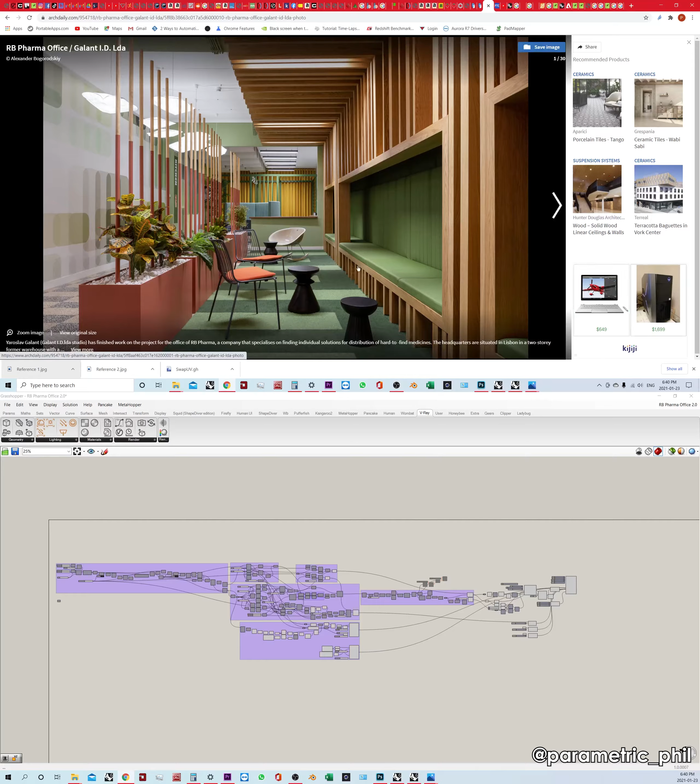There's a lot of aspects of this design that I think are brilliant. There's also a lot going on, which is difficult to manage in a project like this when there's so many different design motifs going on. But I think they pulled it off pretty well. The color palette is beautiful, they really did a good job on that. And there's a lot of interesting features in this design.

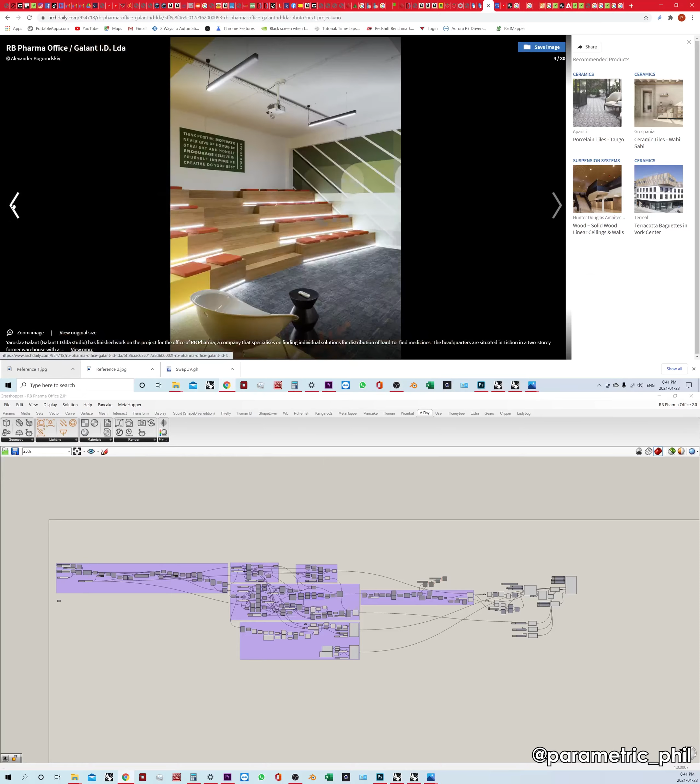But if you look, a few of the things that are really interesting for us when we're looking at parametric design is this kind of wood installation on this feature wall. That's a really interesting design with the integrated bench.

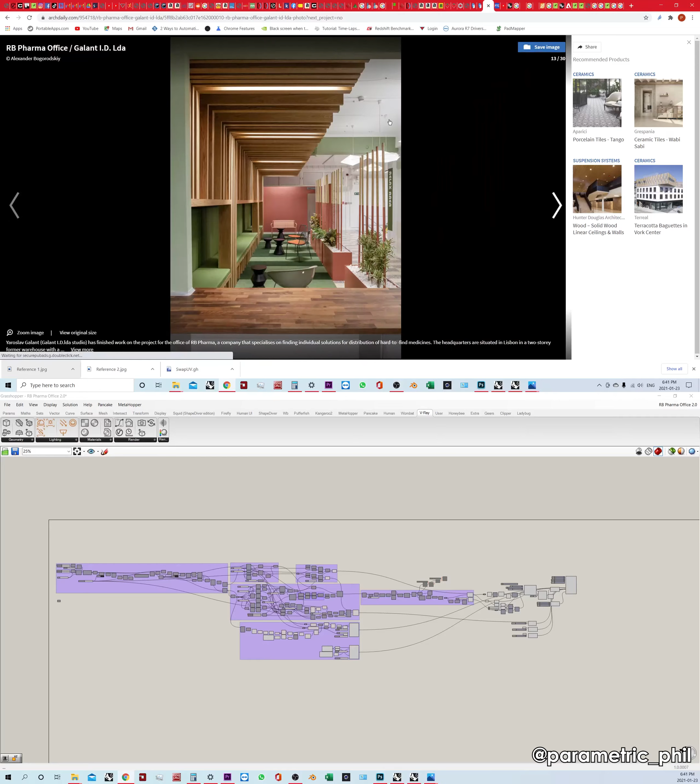It's interesting because it sort of gives this organic feeling, because you can see the randomness. You can see that there's no consistency in the spacing and also the lighting. It really gives that kind of organic feel, and it just goes to show that organic design doesn't always have to be some crazy flowy design. It can be something more rigid, but as long as you incorporate some amount of randomness into the design, it feels a little bit more comfortable, I think.

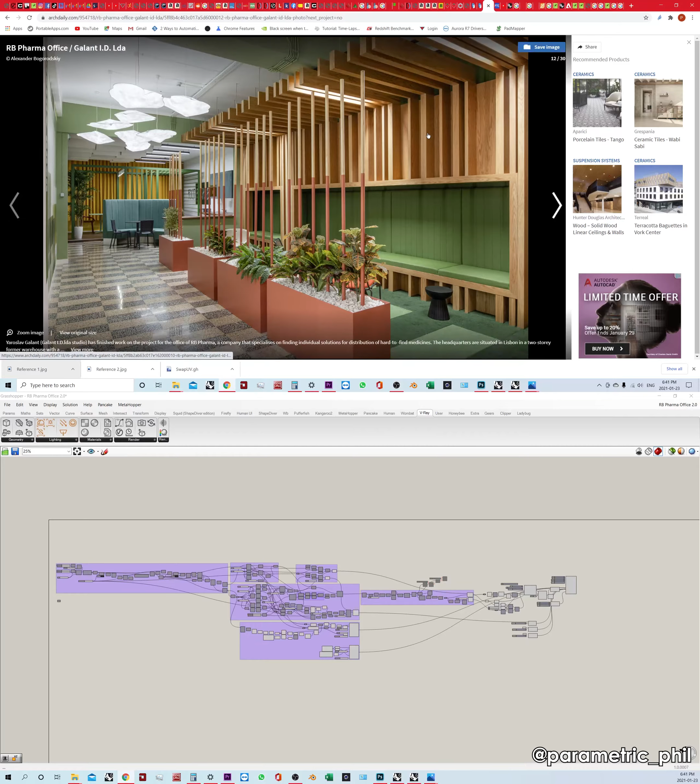So that's the project that we're going to be focused on today. But let's look at a few of the other designs that are going on here.

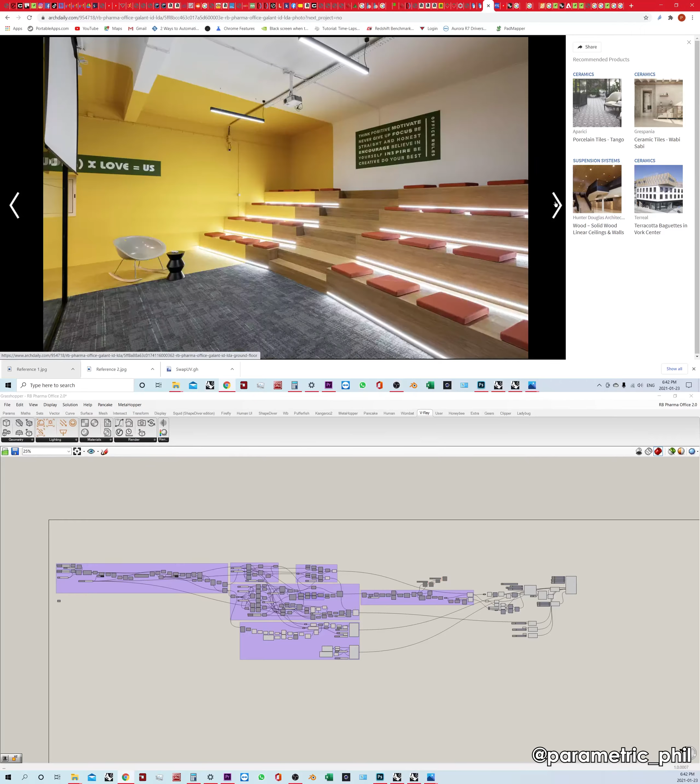But we can also see this organic motif in this wall here. They have the strip lighting, but you can see they've integrated that kind of randomness in here, which I think is doing the same effect.

When you integrate some amount of randomness into the design, it kind of loosens it up and makes it feel more natural. But it's sort of like a modern interpretation of a natural environment, because obviously everything is 90-degree angles, straight edges. So it's always kind of interesting, oh, here's another picture of it.

Really interesting design that they're working with here. But obviously a lot of different things going on here. I don't know if it's too much, but it seems to work pretty well. So it would be fun to check this place out in person.

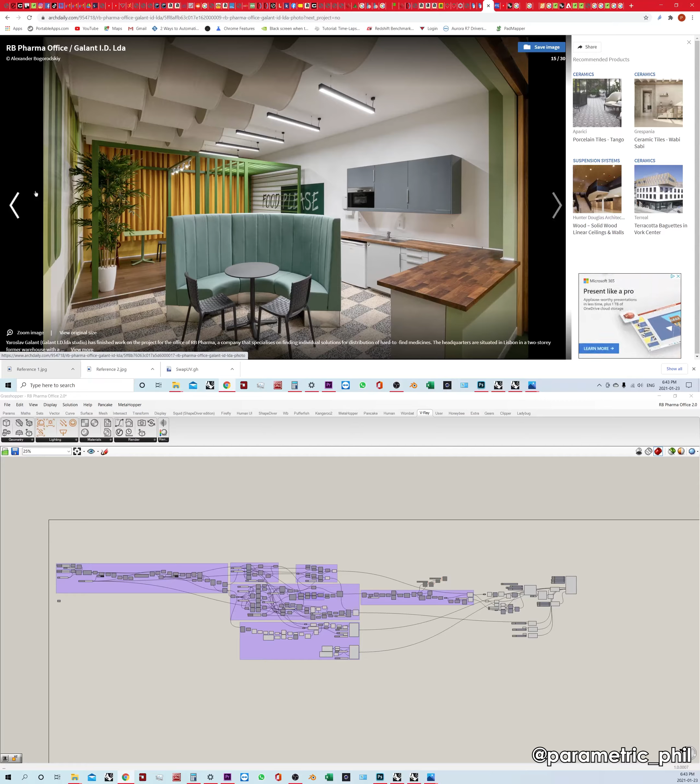So anyways, let's take a look at this feature wall. Well, I don't know if it's a feature wall, there's a lot of features going on here, but this wall in particular...

This is a project that could benefit from a parametric tool like Grasshopper. As you can see, it's like an array, because every single piece is the same, and we're kind of arraying it, except the spacing is not consistent. The spacing is random, and then we're going to punch some holes into the design to create our benches. So that's the fundamentals of how this is working.

Now, a few of the things that we want to be thinking about is, how do we create spacing that's not too large, not too small, but mostly how do we create this array so that the objects don't overlap? Because we have spacing here that goes down to like 10 millimeters, it looks like, and some spacing that goes up to like 400 millimeters. How do we create something like that so these objects don't overlap?

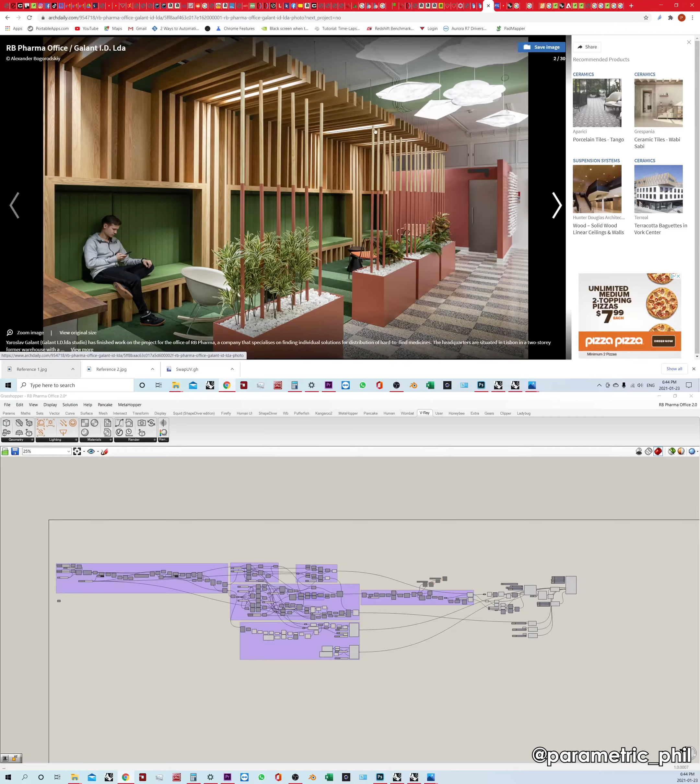Well, let's take a look at the Grasshopper script. So let's head in here. This is one of the renderings that we ended up with, and this is what the model looks like.

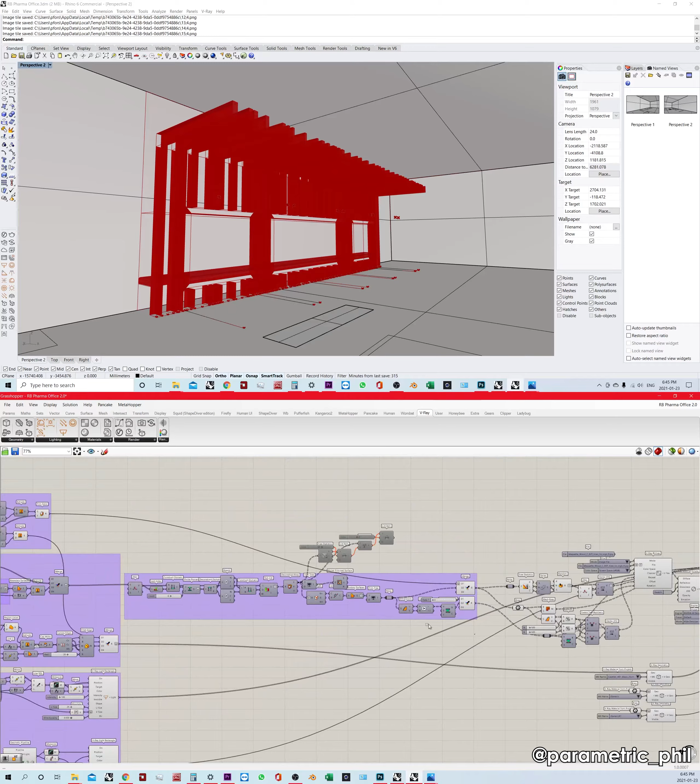The script is bigger than I thought it was going to be. It got a little bit out of hand when I got really into the parameters, and I wanted to be really strict about the final parameters of this design.

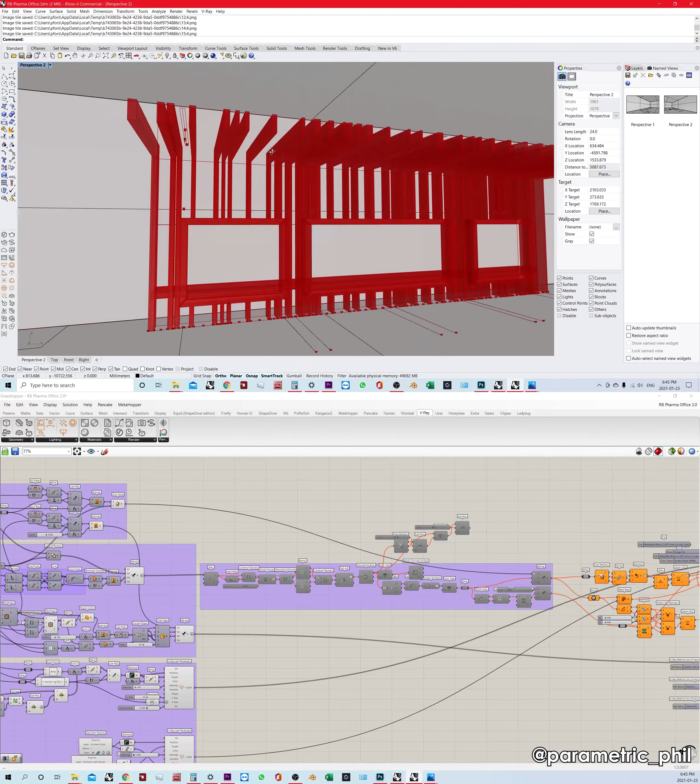The reason for that is, like I said, I wanted to create this inconsistent spacing, but I wanted to make sure none of them were overlapping. This was just sort of a brain exercise. It's more complicated than it needs to be, but I wanted to go through the exercise of doing it right and practicing precision in this script.

So how does this work? Well, we could make a script that either does an array along a curve or a linear array, and then we could shuffle them around to change the location of them in the x-axis. But then you would probably have some of them overlapping.

We could also just set up an algorithm to basically create random values from this point to this point, and then it would lay them all out, a certain number of them, between those two points. But that would also most likely result in overlapping objects. So how do we avoid that?

Basically what we're doing here, in this section of the script, is... let's see, how does this work? By the time I get to the end of the script, I usually forget exactly how the start of the script works. Well, basically we're creating multiple objects first.

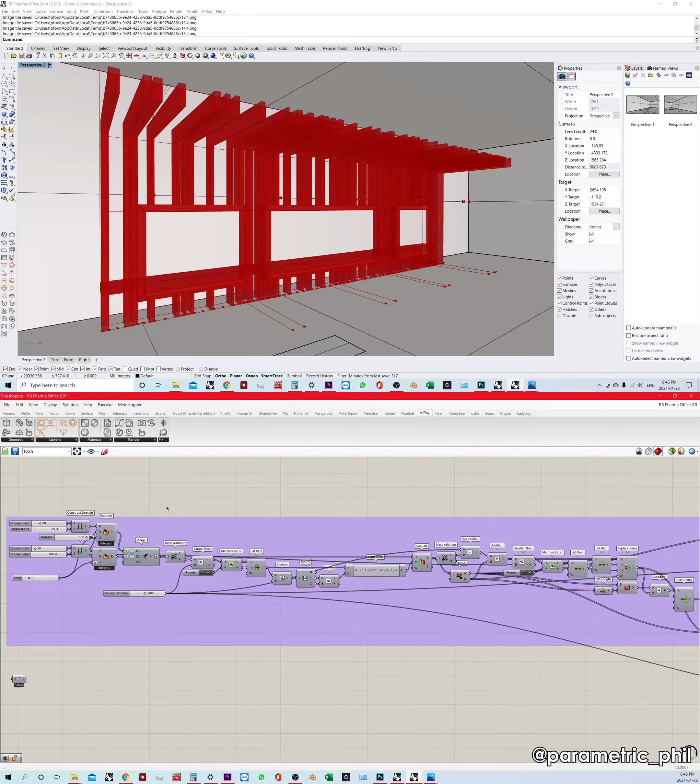And we're creating... this part of the script right here is just creating the random widths, because the width of each piece is different. So we have our minimum width and our maximum width of each piece, and then we're adding up those.

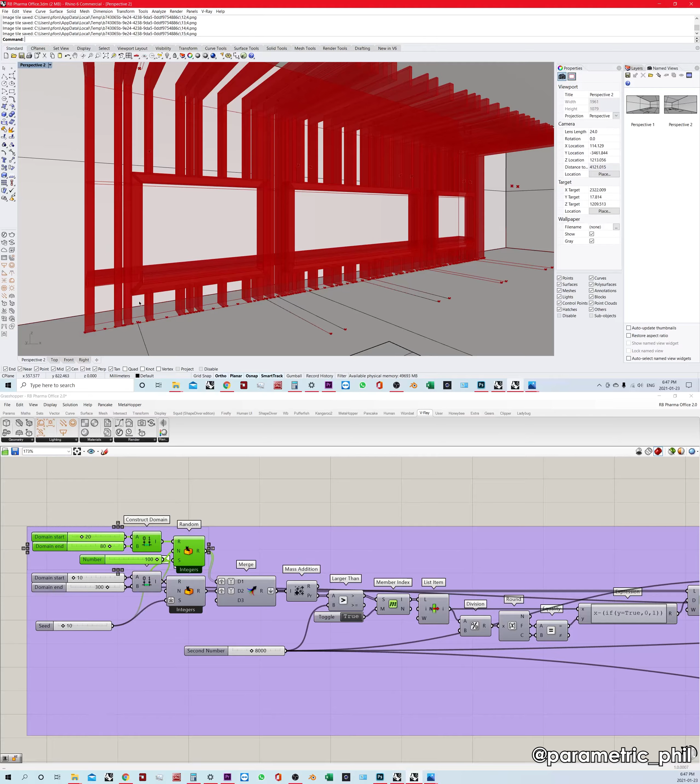We're adding up the total thickness of all of these pieces if they were smacked together without any spacing, and then we're looking at how much space is left. And that tells us how to divide that space to create the spacing between our members.

And what we're doing here, with this part of the algorithm, is we've specified what the minimum spacing is and what the maximum spacing is, and that's how we avoid having any overlapping components.

And then we create a random list so that we're getting random spacing. Now, it's important that we put different seed values into each random component, or else we're going to see some amount of patterning that we don't want. We want to make sure to break up that patterning.

So basically what we're doing here is we've merged these numbers, which is the thickness of our members, and then these numbers, which is the width of our spacing. We've merged them, but we grafted our merge inputs so that we're getting alternating streams of data.

So we're getting one stream of data from this and then one from this, because we've grafted it and then we flattened it on the output. So we're getting the width of a member, and then the width of a space, and then the width of a member, and then the width of a space.

And that way we have a list of our data for how we're going to create our members and our spaces. And this is intentionally made to go beyond the total width of the wall, because we need to specify these parameters.

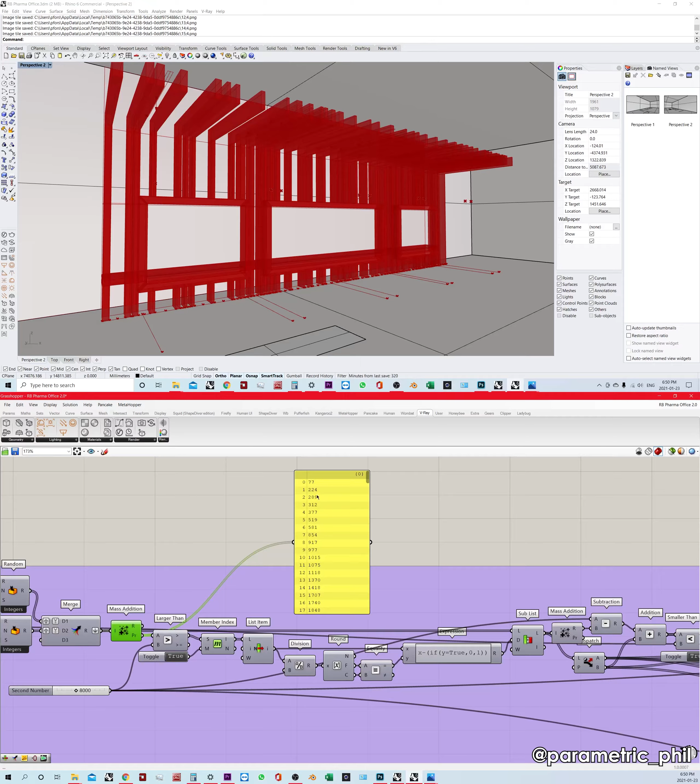We did a mass addition, and we used the partial results output of mass addition, which adds each one sequentially, right? So each value in this list is a summation of all the previous values. And that's how we get this kind of stepping list, which tells us the step of each object.

And so this is how we find our cap, because at some point in the algorithm we go beyond our width, which is 8 meters, so it's 8,000. Right at item 77, we've gone over our maximum width. So our script is going to find that maximum, which is right here. Our index is 77, like we said.

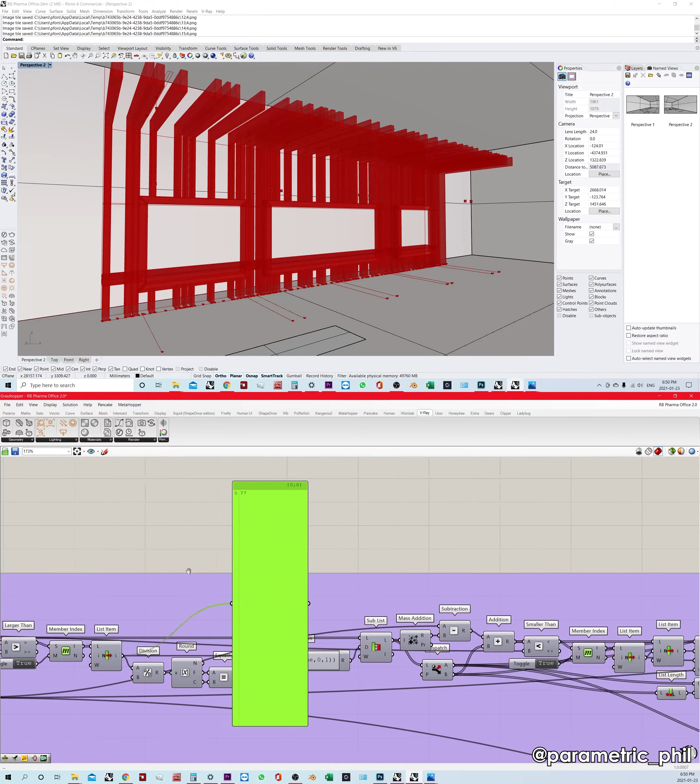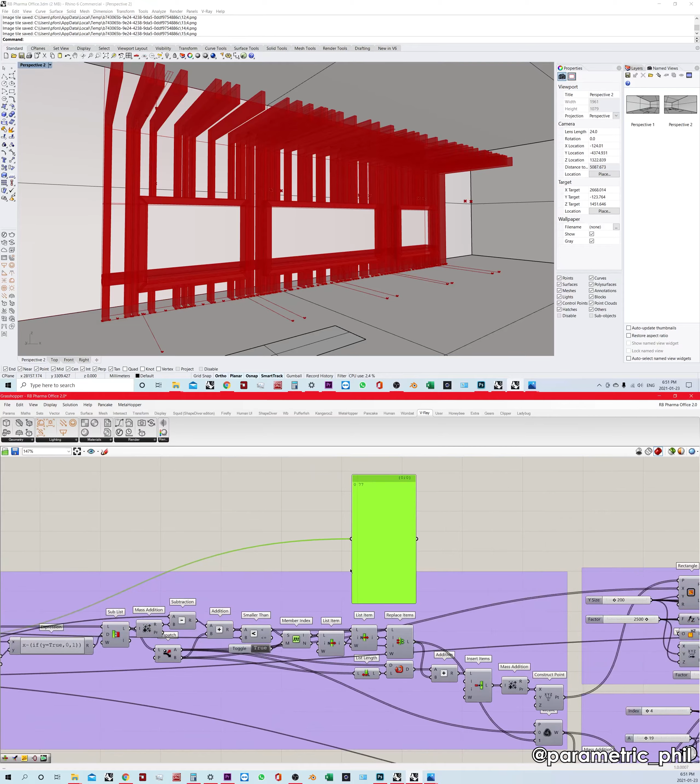What the algorithm does is basically account for the fact that the spacing may not totally conform to 8 meters. So we're doing a little bit of math to find one of the spaces that can be reduced, and we're reducing the whole installation to fit into exactly 8 meters. I'm not going to go totally in depth into all this because I'm trying to make these tutorials just kind of an overview. It would take a long time to really go into everything that's going on here, so I'm just trying to give you an overview of the methodology.

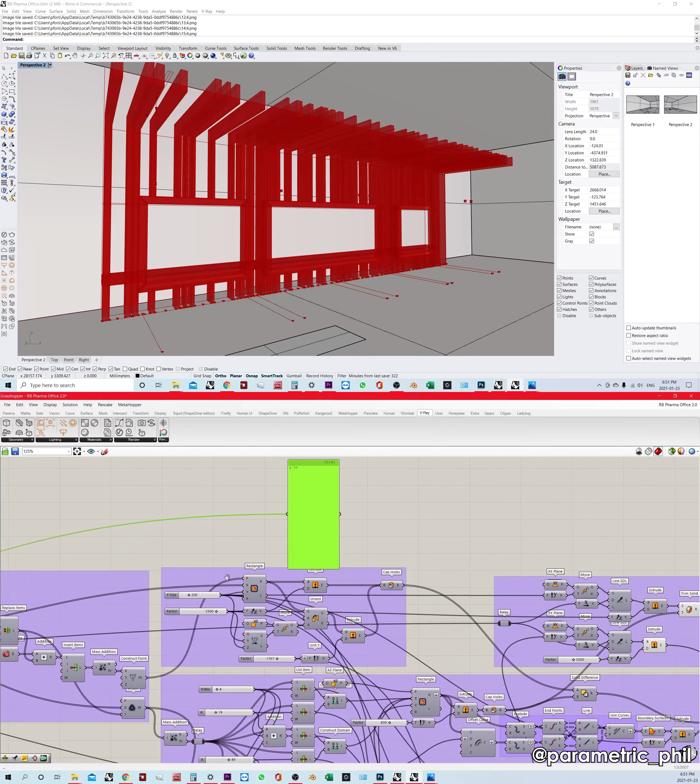From that point, once we know how many members we want, we fit them all into that spacing, into our maximum width, and figure out the spaces of our members. At some point in the algorithm, we use that data to create our base rectangles, down here. We're plugging in from this list, these partial results from our mass addition component, and from this list that's how we create the origin of our rectangles, and also the domains of our rectangles. That's how we get our base rectangles, as you can see down here.

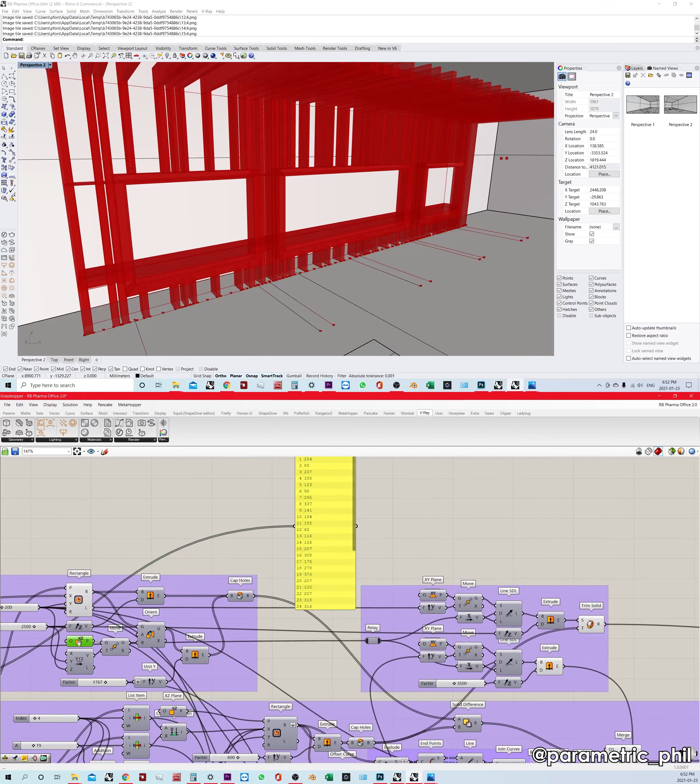We can extrude it, which is the simple part. Then we can also create an XZ plane at the top of our vertical extrusions, and that's where we make some more rectangles. We can extrude them to create those overhead members, and we'll cap all of those members to create our solid geometry.

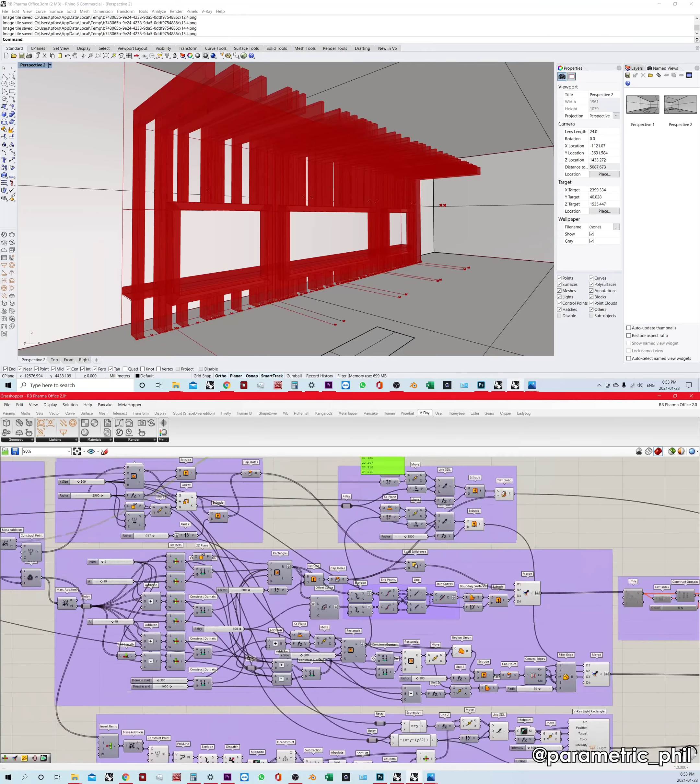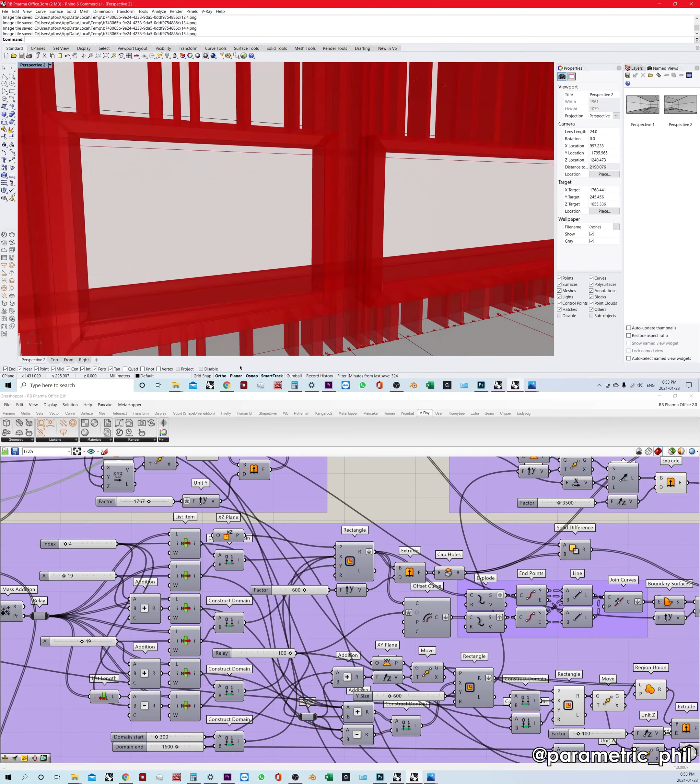So we have some fancy stuff going on here that I'm not going to get into, but this part of the script is being used to locate these punches. I've located these punches so that the edges of the frames line up exactly with one of the members. So these sliders are being used to identify which member I want to line up with. This wasn't something I could automate. I couldn't think of a way to automate this because there wasn't really a direct pattern about how it worked. If there was a pattern, I would have tried to automate it, but there's not really a pattern.

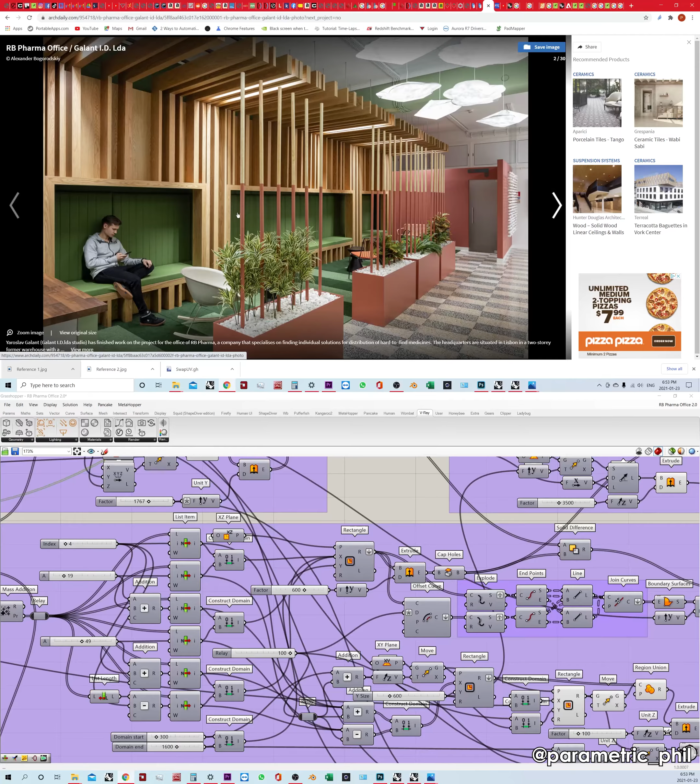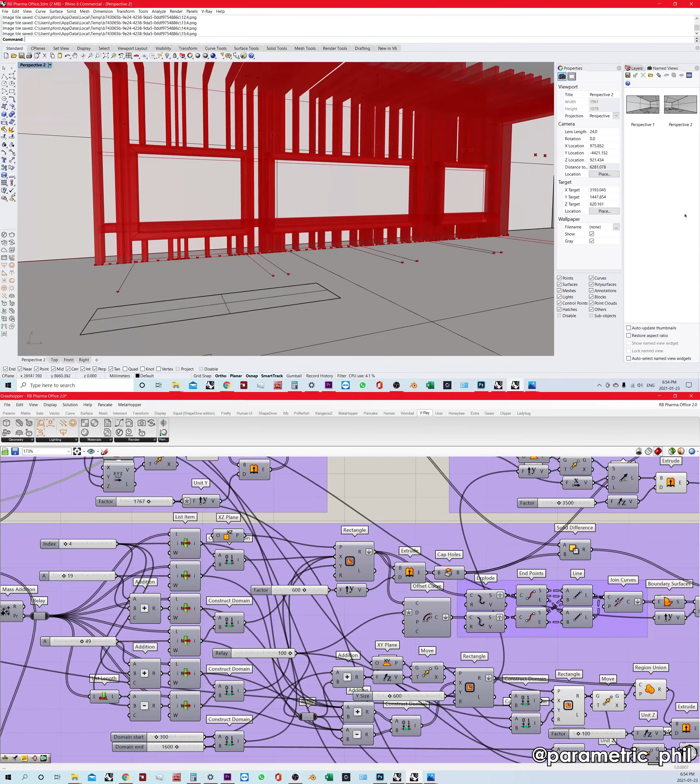All I can tell is that it looks like there's a spacing of 3 vertical members between these punches. So I just kind of did it by eye, using these sliders to visually line up the punches, the frames, so all the frames line up perfectly with a vertical member. Then the algorithm is basically set up to allow 3 in the spacing and 3 on each end. So we only have to mess with a few sliders to obtain this result.

Then we're creating our frames using some of that same data. We're also splitting up these frames into mitered sections, and that's just for the purpose of rendering. That's why you see this miter. It's super important to do something like that so your renderings look proper. You can see that miter - it looks so much better than if I didn't put that miter there.

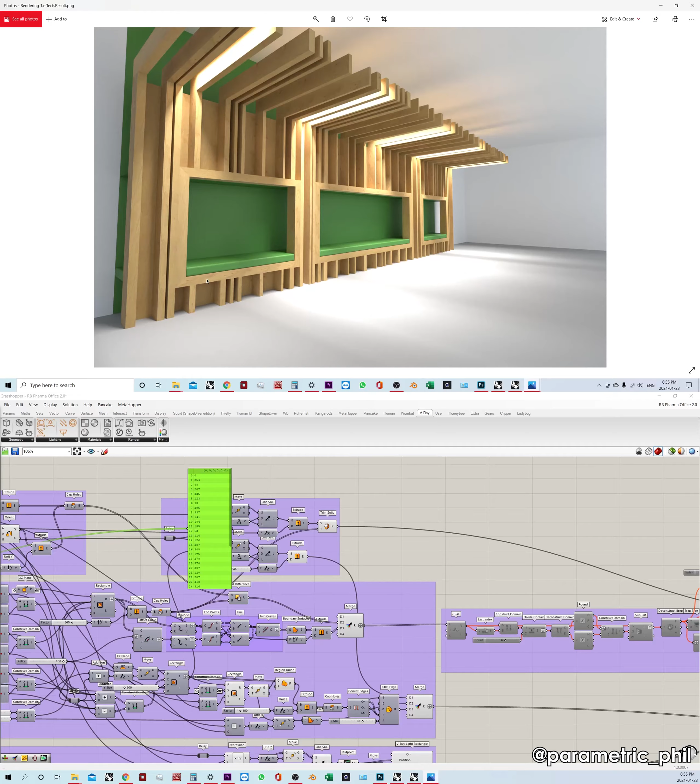Then the wood grain would be going in the same direction, and this would be a seamless joint, and it would not look realistic. These are some of the details that really make a difference, so I needed to make sure to miter that corner, that edge. Okay, and then some of this stuff is just basically making the cushion, which is not that exciting - just a lot of connections.

Again, the whole thing is entirely parametric, so if I change the width, the whole thing will change, or the height, or I can change the size of the punches, which is why it looks so complicated. If I was doing this for a client, I would spend a lot more time cleaning this up, but this is just a quick case study I'm working on for the day, so I'm not going to spend time to clean it up and make it look really neat.

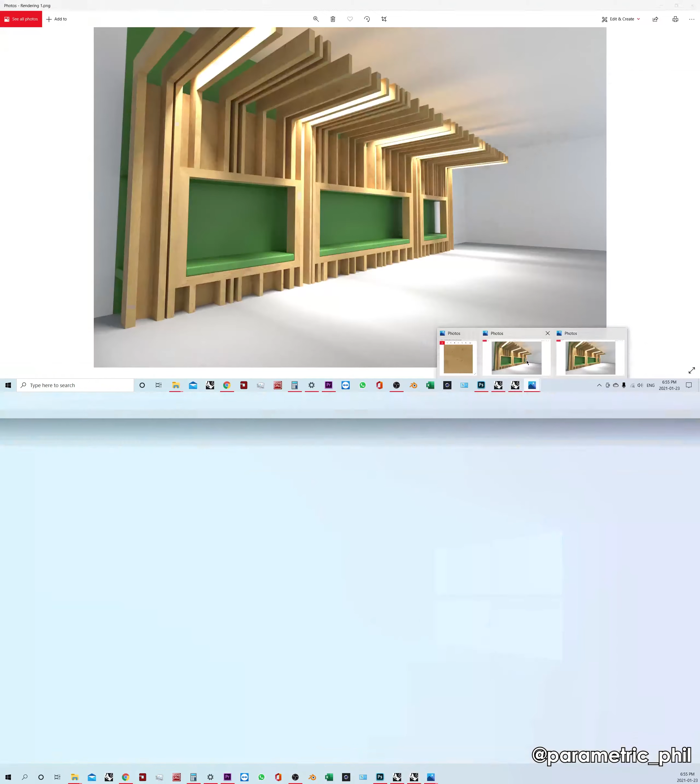One thing I should point out is that putting a fillet or chamfer on your edges makes a huge difference in your renderings. You can see that clearly in this cushion - putting a fillet on that edge made a huge difference in the visual effect. I didn't do too much, since there's very little detail in this model so I kind of just prioritized, but I knew that was one of the things I had to do, or else it would have looked weird.

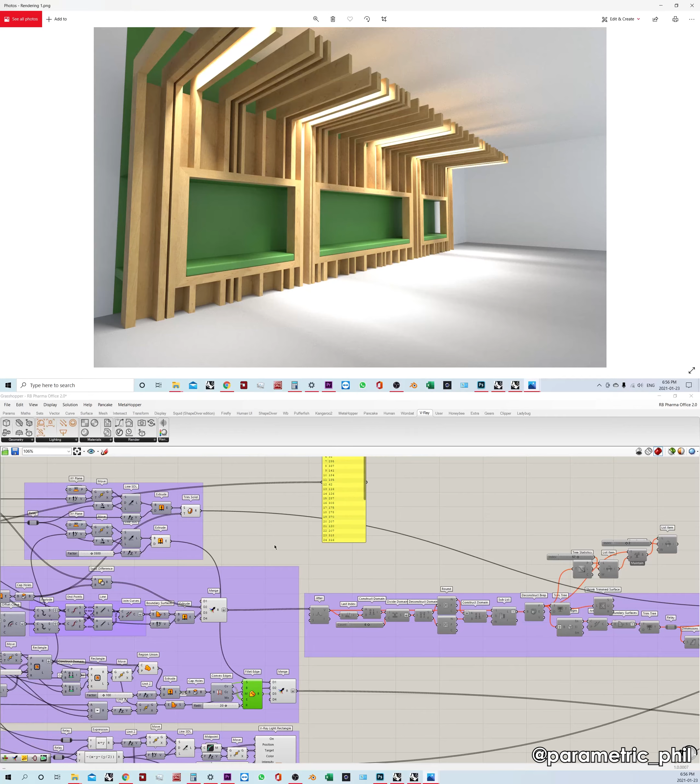Okay, and then all this stuff - this is where we placed the lights that you can see up here. Again, it's all done in V-Ray Grasshopper, and so we have our lighting in between these slats, or in between these wood objects.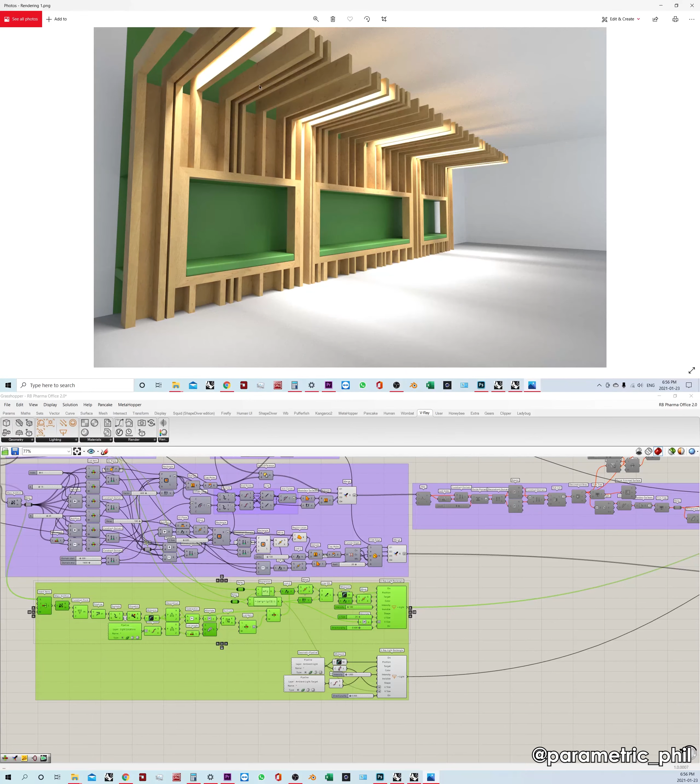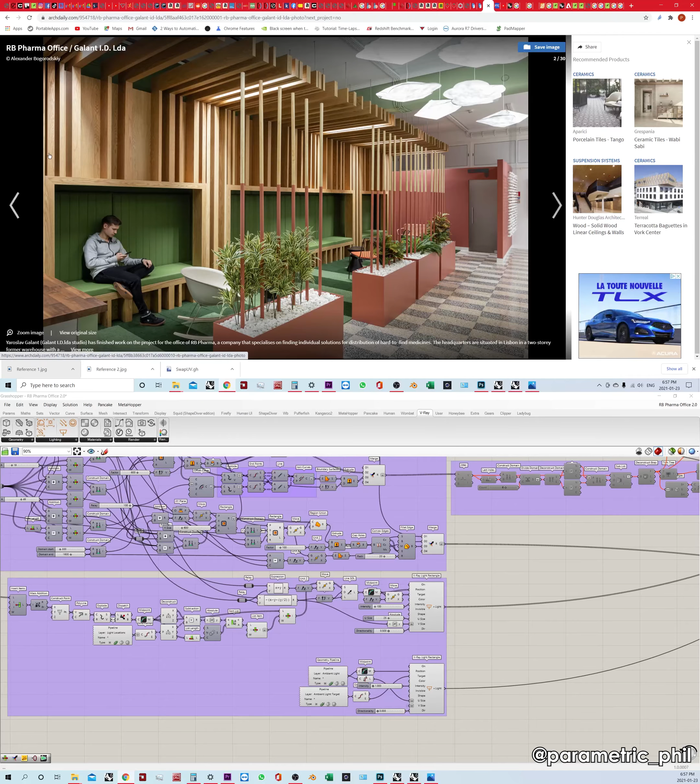In this part of the algorithm, I basically placed the lights with these curves, because in this case there wasn't any pattern I could identify for placing these lights. It's kind of random, but I didn't want it to be totally random, because it looks like the lights are being grouped - there's one here, then it skips one, and there's a light here, just two lights here. So there's not really a pattern, but they're kind of grouping. I didn't want to make it totally random, but I didn't know what pattern to conform to, so I just laid them out manually.

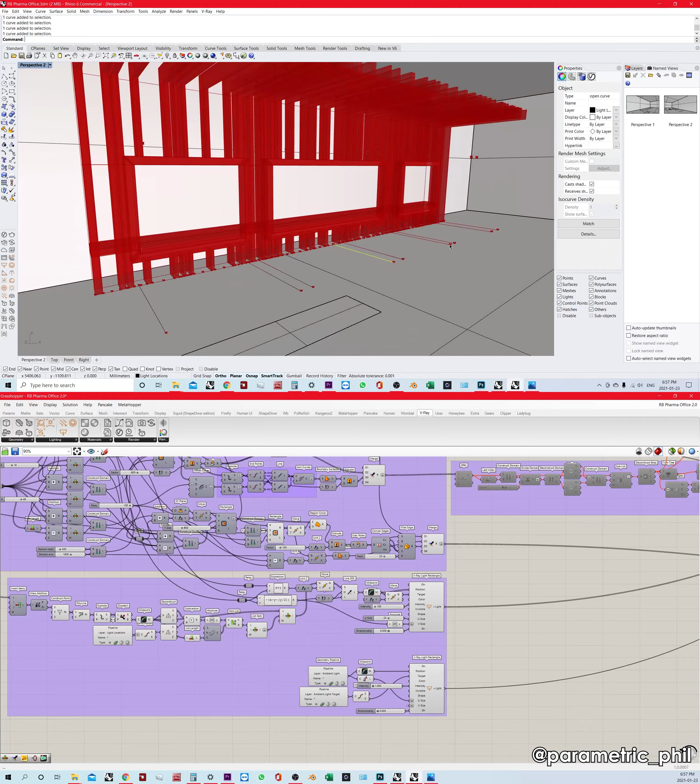All I'm doing with these lines is laying them out in their approximate position, and then this part of the script finds the exact midpoint between the two objects that this line is closest to. So this is not an accurate operation - the goal is to do as little as possible manually. I'm just placing these roughly where they should go, and the algorithm makes sure they go exactly in the center.

So we're creating a light rectangle for V-Ray, and that's how we're achieving that. This is just an overall light rectangle for the ambient light.

Oh, and we're also creating some punches at the same time that we created these frames - we created some objects to do our Boolean difference, our solid difference. That's how we created that solid difference.

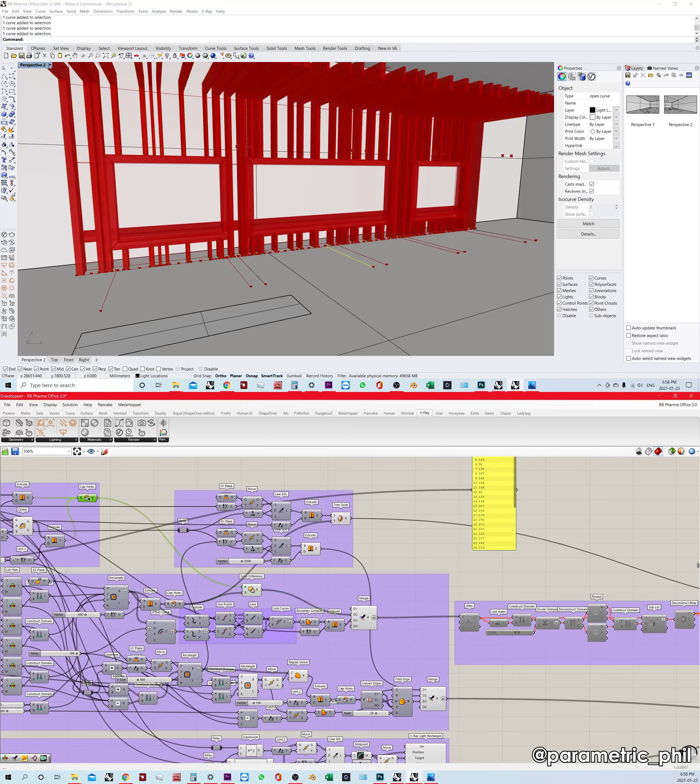These are our original members, and then we punched a hole in them with this member. And this is our back wall.

What we're doing over here is we're splitting up these members into separate groups for the purpose of rendering only. So everything up to here is just modeling, and everything after this line is for rendering only, just for the purpose of representation.

What I've done here is use this part of the script - I use this in a lot of different projects - to split up the components into different branches. I do that so that I can use slightly different colored bitmaps when I render it.

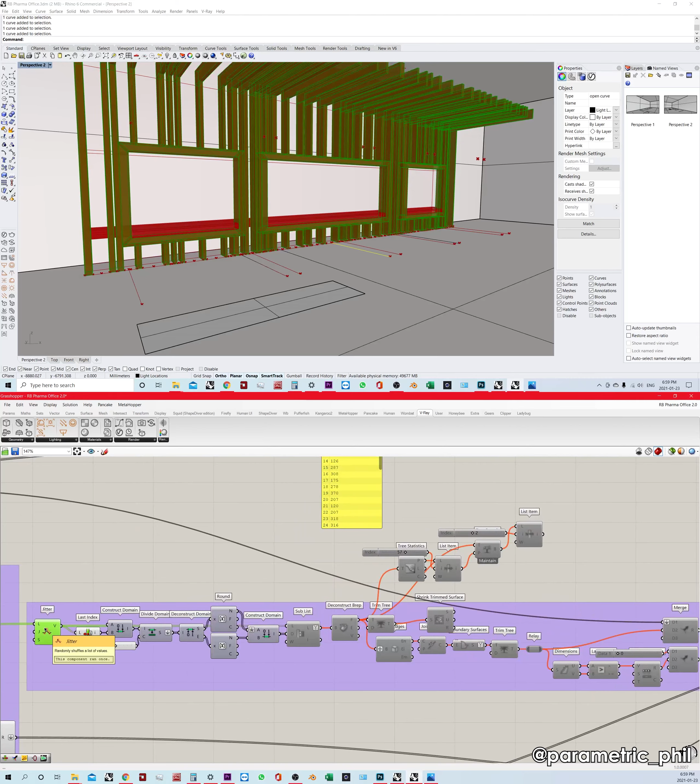So I'm basically taking all these objects, putting them through the jitter component, which messes them all up and puts them into a totally random order. Then I split them into 6 branches based on this slider. You can see on the sublist component that we have 6 branches coming out of this, meaning these are randomly sorted into 6 different branches.

And then I'm exploding these B-reps into separate faces, because it's going to be easier to do our texture mapping if we're using separate surfaces rather than joined B-reps.

I'm keeping the faces in the same branch, so at least the different faces of one B-rep have the same color material applied to it, but different B-reps are going to have a slightly different color material applied to it.

The rest of this script is being used to identify the long direction of the face, so that the wood is oriented so the long grain matches the long direction of the wood. We're measuring the UV dimensions of each surface individually.

This part of the script is basically saying if the U is longer than the V, that's good, meaning the bitmap is going to map it properly on the surface. But if the U is shorter than the V, then the bitmap is actually going to map in 90 degrees, in the wrong orientation.

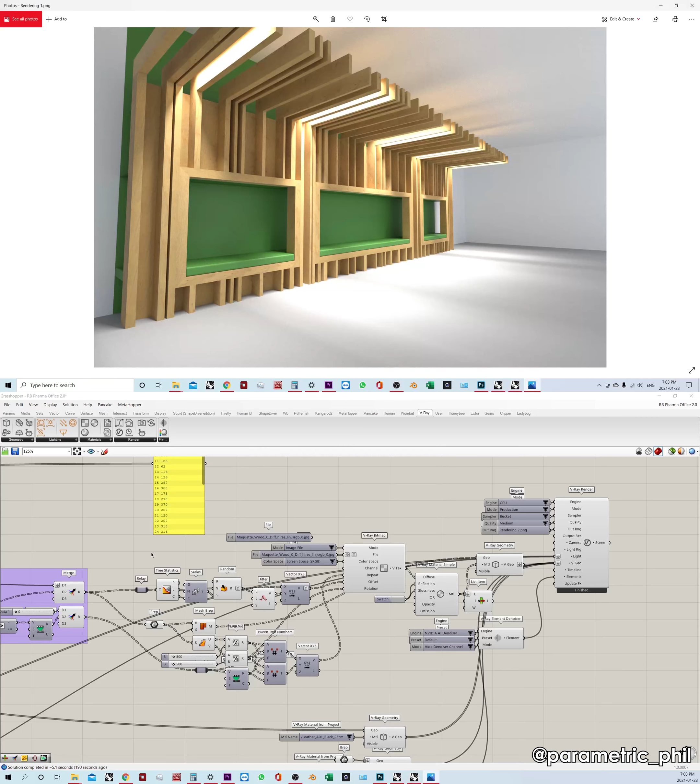The reason we have these 6 different groups, these 6 different branches, is that we actually have 6 different material files, slightly different colors, but this is all taken care of parametrically. What we get is a little bit of contrast between each piece, which makes it a lot more realistic. So that's the basics of how this is all working.

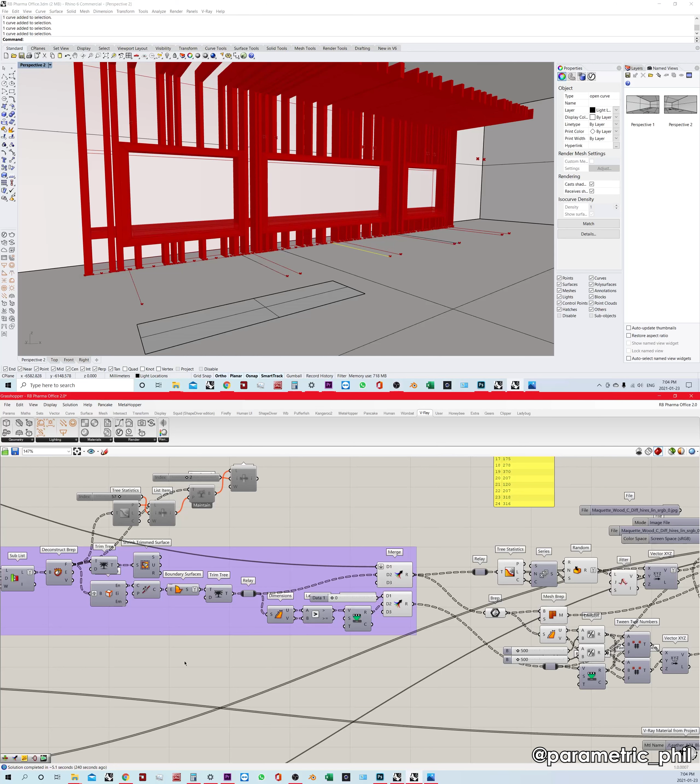I think it's just really important to do this often, to train the brain to think along these lines, from the perspective of data management, and from a mathematical and geometric perspective. So that's why I do it.